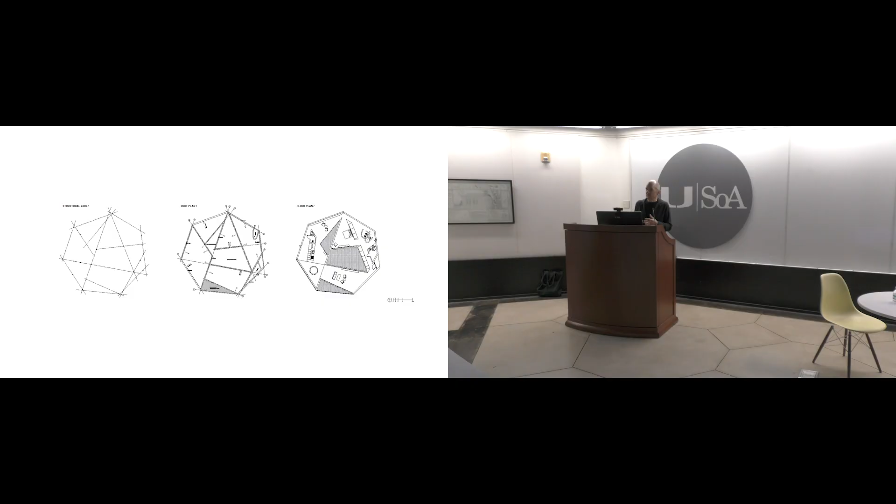And if modernism had transparency in the dissolution of those spaces between inside and outside, I'd say really we're in all spaces at the same time, almost between our body and our psychological self.

Architecture is defined, I would argue, by its generational spatial problems. Not so much the form or the decoration or the aesthetics of architecture, but really by its spatial problems. And simultaneity might be one of our great spatial questions.

You see in the house on the left, this kind of pivot point in the house where the master bathroom is straight ahead of you, the bedroom is in front of you, library on the right with the courtyard behind. All of those different spaces are seen equally from that singular pivot point at the same time.

This idea had a real effect on Carver Apartments, which was one of the first of a series of permanent supportive housing for formerly homeless individuals that we began to do with an organization, the Skid Row Housing Trust, where it was explored as an idea at a kind of different scale and more lodged in the city.

This project is very proximate to the freeway, immediately adjacent to the 10 freeway, with a continuous ground plane because the highway is elevated at that point. The shape had a lot to do with acoustics—the highway is very loud. By shaping the building, it started to deflect and pull away from the sound source, but it's also for the speed, intensity, and identity of the highway. The building almost seems to spin or pirouette as you move around it.

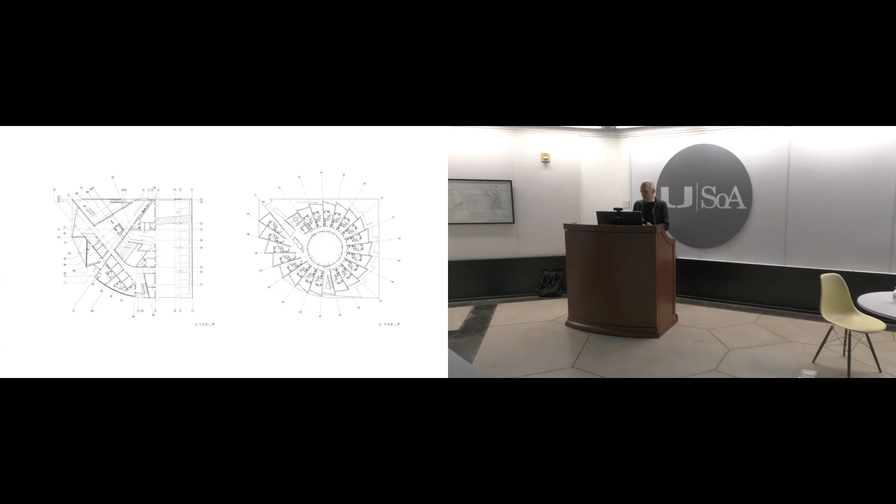As you move up from the second floor above, the building is organized with a series of studio apartments in a kind of spiral shape, all facing an internal courtyard. The building is built in the way that we build almost everything in Los Angeles housing: five floors, maybe four to five floors of stick-built construction above one floor of concrete.

What was interesting to me was that idea of the concrete on the ground floor, because it felt like it had some relationship to the highway and the underneath of the highway. I kept having this fantasy that the building was in some ways connected to this larger idea of infrastructure. At the ground level, you can see out through the building to the highway underneath it.

Internally, the courtyard, as you're looking down, has a series of steps which form an amphitheater. They become a kind of social heart in the building. But as you're looking up, you see the sky—it's open to the day, to the night, to the weather. And the light reflects down along those fins, which help to create some sense of veil, a little bit of privacy as you move around the internal space.

But they have to do more than that. In all of these projects, the economics are so difficult that every element, in my mind, has to have a kind of tripleness to it—it has to do three things. In this case, it acts as a kind of visual screen, and it has the structural hangers, so all of the balconies are hung off of the building.

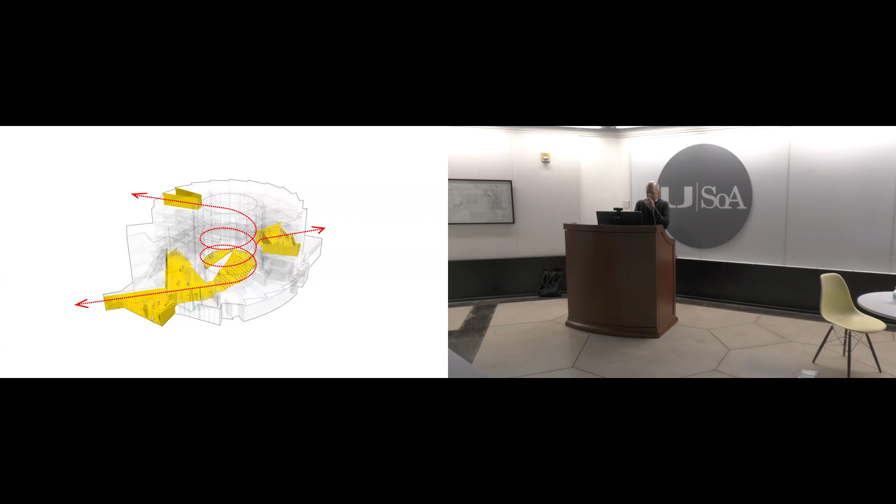There's a series of community spaces in the project, not all organized on one level, but spiraling up along with the building: community kitchen and garden on the ground floor, that amphitheater I mentioned, and at the top floor this outdoor porch which looks to the city. Maybe one of the most important spaces is at that middle level on the right-hand side, which is the TV room and the laundry room.

It's a place that people, even though it's not very glamorous programmatically, is the part of the building that everybody goes to almost every day. I placed that on the same level as the elevated 10 freeway, so that when you're in that space, you're seeing the people passing by, and more often than not, stopped in traffic right outside that window. But the important thing is the reverse of that equation, where the people on the highway, who normally move by this community and leave it in a kind of anonymity, have the opportunity to look in and create a kind of connection, even for a moment.

When I was doing the project, I had this fantasy of connecting two types of civic or city infrastructure, housing and the highway. The image starts to portend that, but the idea of infrastructural scale really stuck with me. Could housing be seen as an integral part of the infrastructure of the city in the same way that bridges, roads, waterways, and electrical power lines are? Could it have that same kind of essential importance, and also borrow some from that scale?

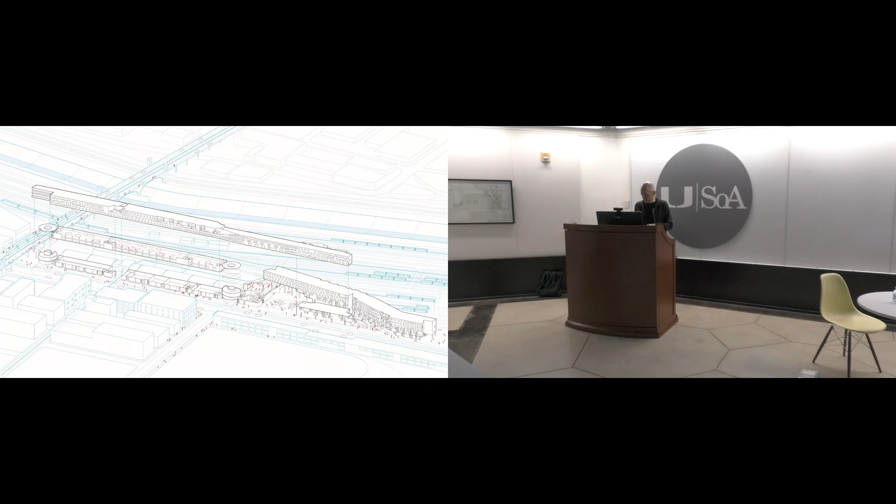The program is organized almost like a Neapolitan sandwich of different program types. At the top it's primarily housing, everything from single studios to 4-bedroom to living room spaces—almost the most affordable way to live here, since you can live as a group of 8. In the mid-level there's additional housing, but also two levels of above-grade parking that can be converted in the future to additional housing units. And at the ground floor, 80,000 square feet of retail space.

Even at the scale of a building a quarter-mile long in a place like Los Angeles, the suburban model, especially of construction, persists. It still defines the way we tend to build a project. So in this case, while there might be concrete up to the 3rd floor, it's still a wood-frame building for the most part, using and borrowing many of the same assembly-line techniques that built the suburbs outside of Los Angeles, all around the country—Levittown certainly.

The bridge of the building is important. As I mentioned, there's a future rail station coming in on the right-hand side. The building at this point starts to raise up and layer over, almost like a palimpsest, with different functions and other elements of the project, whether commercial or some existing elements—something as prosaic as the parking lot. The parking lot is designed so it can be cleared out regularly and becomes a kind of civic plaza for the building.

I like this image because, going back to that idea of identity—as opposed to architecture that exists on picture postcards, in the foreground or background as a kind of skyline—this building occupies almost a middle ground between those two worlds, becoming part of the textures and fabric of the city. Identifiable at times, you get glimpses of it, but just as often living in a bit of anonymity within the incredibly heterogeneous textures of Los Angeles.

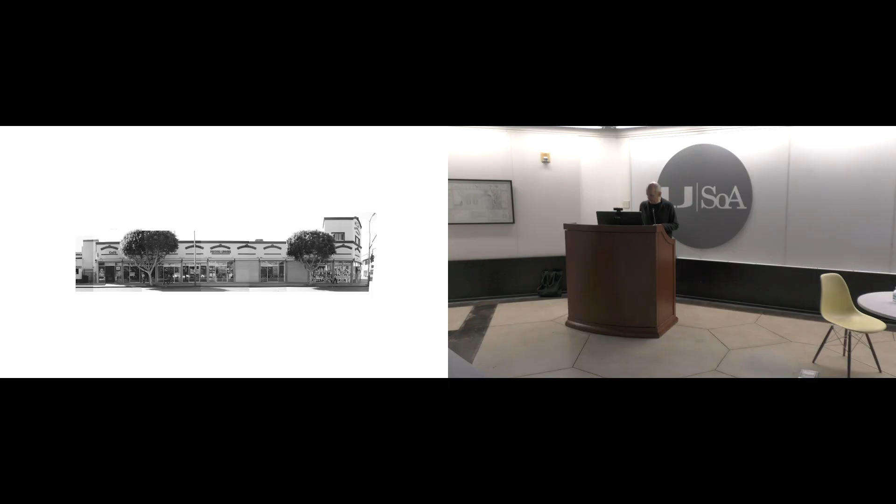There was this one-story existing building that we largely kept. We stripped off the facade, which was just stucco. But all of the structure of the building we kept as the base of the new building. This allowed us to maintain the entitlements to use it as a commercial space, and to be able to reuse the deck of the building.

We then made a new tray—a new concrete tray—that in a sense almost feels suspended above that building. The modular units are then stacked on top of it, creating this in-between space, this layer within the building.

Density, this scale, with almost every part of the site built with this 5-story mat of housing, might not be unusual in cities, and certainly isn't in a place like Tokyo, but is a completely foreign concept in Los Angeles, and really created pressure not only in terms of how you might live there, but in terms of how you might build there.

There was no staging space really for the building, and that's where prefabrication started to become very much an issue. As I mentioned, it wasn't something that had been done, it wasn't even allowed in Los Angeles from a code standpoint. Much of our work as architects was to create a pathway with the city, even before we started design.

To figure out a way for the city to permit and entitle the project. Interestingly, because there's no real prefab in the city, all of the units were built in Boise, Idaho, and then trucked down. When they finally all got there, all of the units were stacked in under 3 weeks, which means it was almost like an instant building. The interiors were completely finished, they were all tapped together, all the utilities were tapped together, and then we placed a new skin on it.

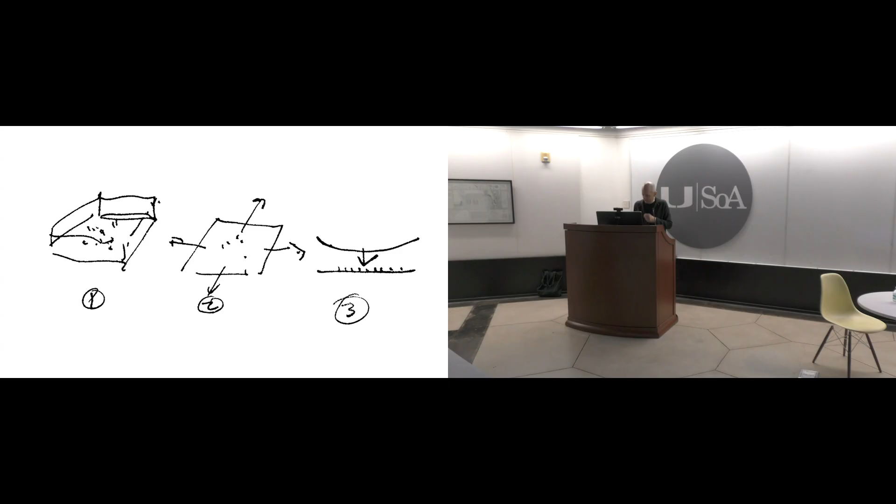That mid-level I mentioned is really the community space for the building. I think there are a number of ways that you can begin to form a room, a place. The traditional way might be a traditional interior space or almost a piazza with buildings wrapping around it to create that kind of urban room. But I was more interested in how you might be able to form that kind of space, not by creating pressure from the sides, but really from the bottom and the top, to create this layer that said something about both what was below it and what was above it.

On that in-between layer, there are many of the community functions organized. There's community kitchen, community garden, where they grow a lot of things for the community kitchen and for their own kitchens. Vocational classrooms, there's a pickleball court in a quite tall part of the space, there's a jogging track, art classrooms. So it's almost like this amalgam of the types of civic spaces you might find in community neighborhood corners and parks in Los Angeles.

Building is built in a very direct way, again almost like a piece of infrastructure. The economics of the building meant that it would be in many ways quite raw, but I think that muscularity is a real part of the character of the building, where you see the structure and the overlaps of those spaces. In some cases, with the stairway, this texture and the stacking of the fluorescent lights create almost a sense of a kind of spatial installation in the building.

The top right-hand corner is where the pickleball court is now located, and that scale of space is also unusual in something like an affordable housing project, but really tries to be a kind of community civic or city hall as much as it is a perfunctory space.

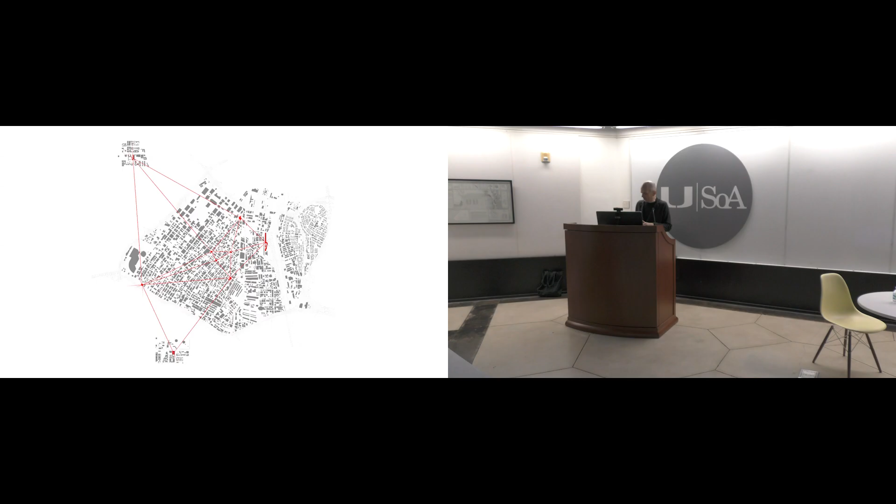It's a more iterative, time-based idea where you begin to add a number of smaller increments. This is a map of the different projects we've done just in the downtown area, with a lot of these Skid Row projects, as well as One Santa Fe, where over time they start to create a network that, taken together, is as large a scale as any of those larger transformative projects, but happens in a way that also weaves the city, the grains, the textures, and the life of the city together. That idea of connection is hugely important to me.

We've certainly been exploring it in ideas about individual buildings and their relationship to the city. But we were also able to explore the idea of true connection in a very realistic way, across lines of division in a more literal way, with the Sixth Street Viaduct that we finished in 2022, which crosses the LA River, connecting Boyle Heights with downtown—you can see it with the arches in the middle of the image.

The fact for me was that the river was just one of the lines we were spanning. In fact, I thought the old bridge, which had these two pairs of arches right at the river, celebrated the river, but in a way celebrated something that separated the two sides of the city, as opposed to the idea of a bridge as a more connective element.

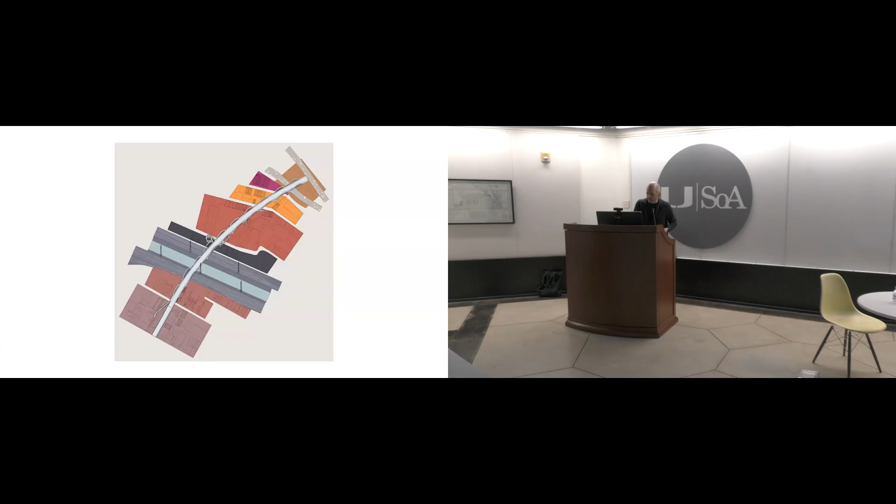If you really burrow down into the analysis of the site, it's not just the river. There are all of these lines hugely part of the city that the bridge needed to move across: water and power main lines, 11 separate rail company lines, the Army Corps of Engineers controlling the river, multiple underground utilities, and 3 state and federal highways. The bridge, in a sense, is a kind of civic skewer across all of those different elements.

This is an image on the left of the original bridge and those arches over the river. Those arches also had another role in the city—they were a kind of icon. They celebrated the river crossing, but they were also celebrated in movies, TV shows, car commercials—Grease on the right-hand side with the bridge above it.

I thought what was important, as I mentioned, was to connect all of these pieces. So I thought of taking that arched form and repeating it as a kind of connective ribbing, tying the bridge together from one side to another, but also maybe top to bottom, because the underneath of the bridge, since it's lifted above, is being developed right now. It'll open in about 6 months, a new 11-acre park for the community.

The arches are at many different spans and heights. The roadway is one big curved arc in plan. The arches tilt outward to embrace the sky. All of that gives the bridge this incredibly animated and alive quality, like it's really in movement. It's not a static or stable image, which I thought, in a way, was an icon for a city that is changing and moving as much as a place like Los Angeles.

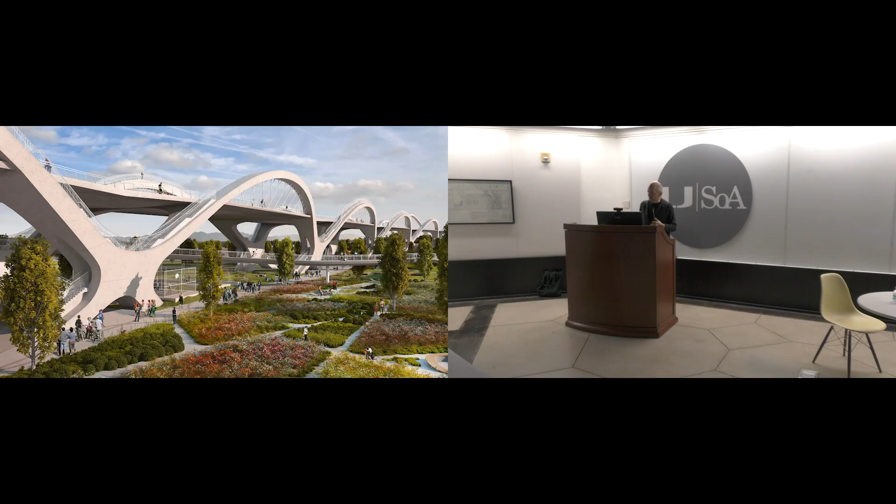I mentioned the underneath—it's just as important, with an 11-acre park designed by Hargreaves Jones. On this side of the park, there's another 1.5 acres on the other side of the river, which is a new performance plaza.

The goal in the bridge was not to just connect the cars side to side, but bicycles, scooters, joggers, pedestrians, and to use the arches as these access ways with stairs and ramps spiraling up through them so that the bridge becomes kind of an animated urban playground in many ways.

This is the park in construction. This gives you some idea, this was a bit earlier. The railings aren't on the stairs up, but you can see how the ramp runs through it.

At the base of each of those arches is a base isolator. It's a bit like a spring. We have earthquakes in Los Angeles. This is the longest base isolated structure in North America, so the entire bridge in an earthquake is able to move three feet in any direction to reduce the loads on the bridge.

But really the bridge deck and those spaces, not just the park, are important because they become this kind of civic piazza or plaza.

In thinking about the bridge, one of the things I was focused on was in a city like Los Angeles, which is a city of many different cultures but separated from each other and divided often by infrastructure, by highways, by culture, by economics, could you push an infrastructural project to try to do more, to try to be a kind of multicultural enabler, a place where many people come together, a place where some image of the city starts to be formed just really by the aggregation of all of those cultures in one place.

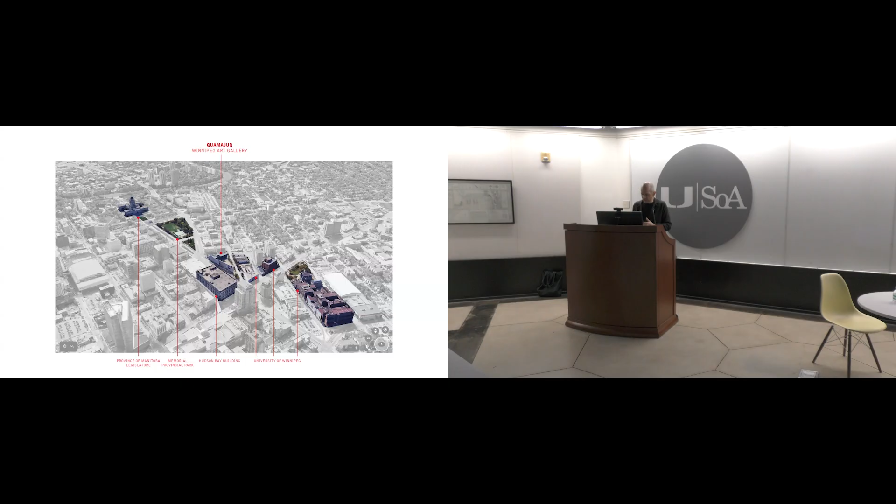It's a complicated site, situated among a series of buildings that are part of this troubling history. The Hudson Bay Company, a trading company and one of the first to go into Inuit communities to trade with them and bring back the art, forms a complex neighboring history to this building. Up along Memorial Boulevard, to the upper left, is the provincial headquarters, and that history with provincial governments for the Inuit community is very fraught.

You can see the provincial headquarters at the end of this boulevard. The existing Winnipeg Art Gallery that we were adding to was built in the late 1960s, 1969, by architect Gustavo da Roza from Canada. A very beautiful building, triangular form, really sculptural, but also incredibly insular and internal, as a lot of buildings from that period were. It's a sort of fortress for the art inside.

The ambition for Qaumajuq was in many ways in contrast to that. It started with a number of trips to the north to meet with the artists and elders in that community, to get a sense of the context at the Arctic Circle where the artists live and, more importantly, practice. It has this incredibly vast scale, and the work they make is completely contextualized in its materials, forms, and meanings by that place. There was a real question: how can architecture begin to make connections across these cultures and places, especially when it exists in the abstraction and scale of a place represented in images?

The museum had a long relationship with the artists in the communities of the North. This project grew those infrastructures and relationships to include the Artists Council, Elders Council, and the artists themselves, like Elisapee Ishulutaq, who is in the periwinkle top with silver hair, one of the most important Inuit artists working today. We spent quite a bit of time there, but it was really in these group conversations, not just seeing the site in the landscape, that we began to embed a number of the ideas most impactful for the design.

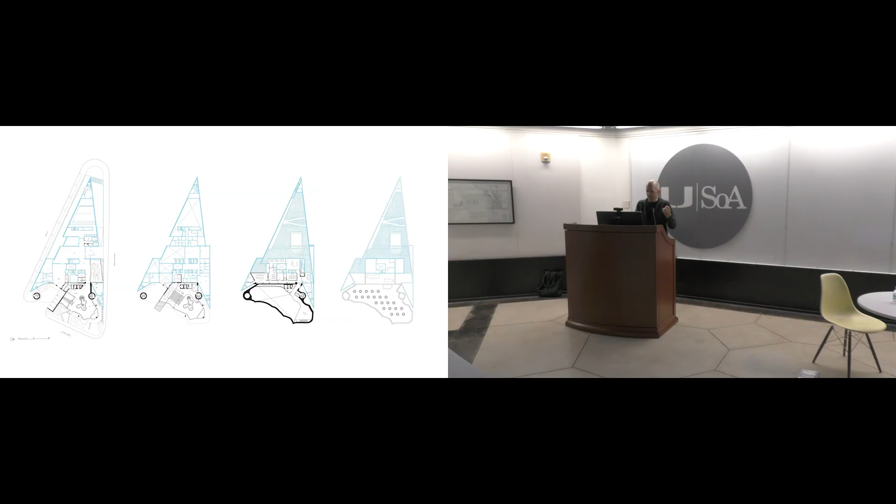The building also had to have its own identity, even if it was joined to the Winnipeg Art Gallery. So in a way, the existing building and the new building were meant to be two separate objects, but almost acting as one object in conversation.

The building is made out of granite bricks. That was another consideration. The artists had asked that the building really be made out of stone, much like the sculptures they make are made out of granite and stone. The building feels like it almost floats off the landscape.

It has a kind of scalloped form, which certainly communicates a bit of that fluidity, but it's really trying to capture the light of the place. The light in the north, but also the light in Winnipeg, is very beautiful and changes significantly. It almost seems to embed itself in the material as it moves across those facades, and the building and the light interact in a way that changes significantly over the course of the day.

The bricks are laid in a kind of wave pattern that slides across the facade, giving another kind of scale to the facade over the course of the day. At street level, the building lifts up and becomes very transparent, so that the inner portion of at least the public spaces can be seen whether you're coming into the museum or not.

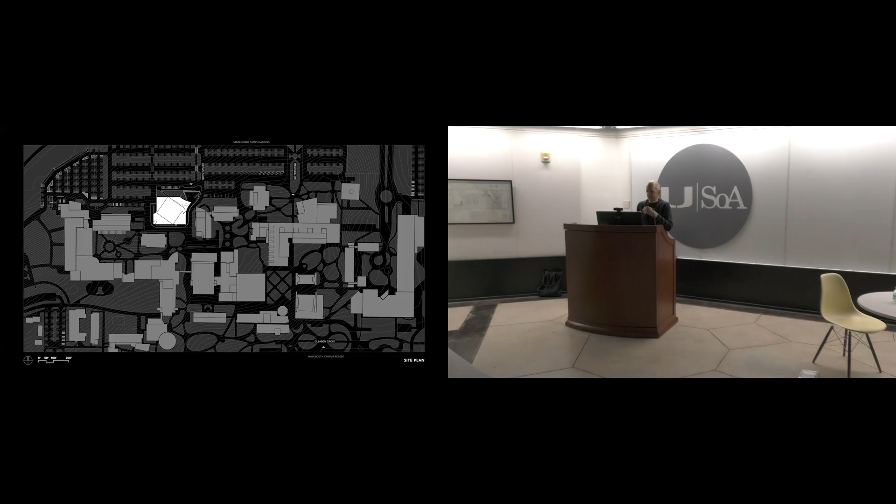The campus has expanded over time, and our building is at another end of the existing campus, really a threshold between the campus and the outside where all the parking is. It's a 750-seat full proscenium music hall, and has, because of its two-sidedness, two very distinct edges. The plan of the theater is at that center — a kind of horseshoe-shaped theater. It almost feels like it rotates as a form between the inside and the outside of the campus.

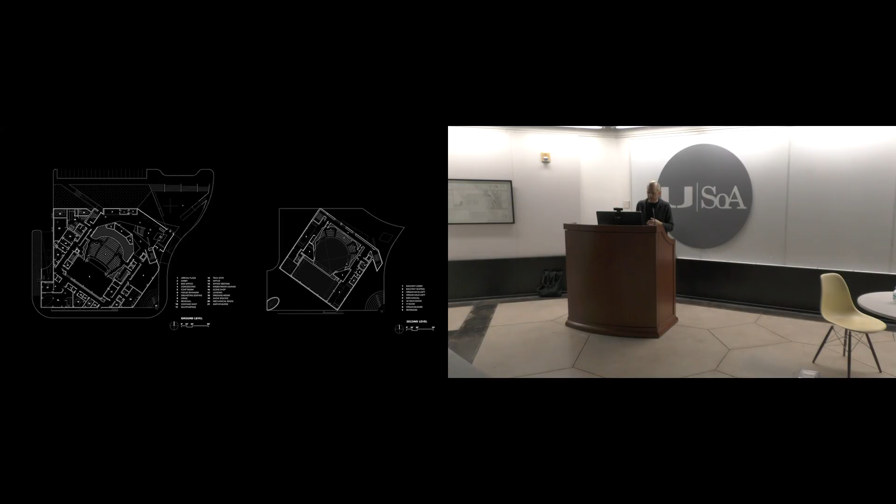What's maybe most consequential is that all of the normal back-of-house functions aren't hidden away in the building, but are organized along the perimeter with glass facades, so you can see inside — the costume shop, the set shop, the rehearsal spaces — as you move around the building.

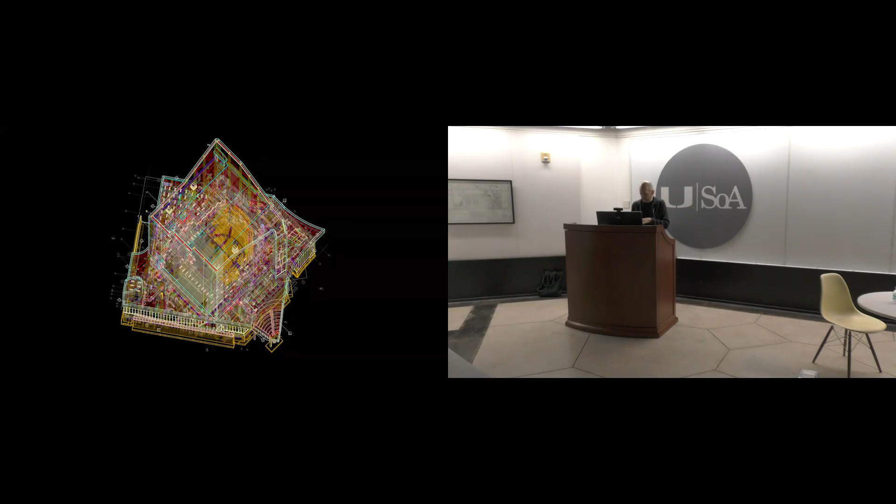There are a lot of things here. One thing I want to point out is the color key, because color here was really used as a sort of material. In this video you'll get maybe not so much a sense — you will in some of the other photographs. Obviously a very different context than Miami.

It really sits along that edge and becomes an entry point along that curved street into the campus. Then moving back out from the campus, you start to see the building and how the rotation of that box comes and registers with the lower plinth.

The facade is an aluminum panelized facade made out of a series of extruded tubes. Those tubes relate to a number of things, one of them being this historic organ inside the building.

As it turns from day to night, the interior starts to become much more visible, and these colors on the inside of the facade become that much more visible. Again, these photographs are from before it's been fully occupied. That whole lower level is where the back-of-house spaces start to really be seen as you move around.

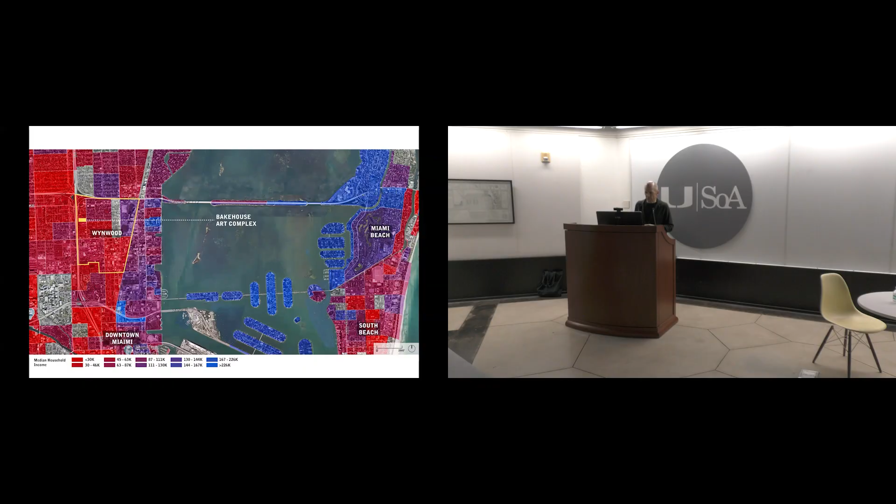This is a map currently of income levels, median income levels. Red is less than $30,000, that's the most challenging economics. As you move to darker blue and purple, the economics, of course, get up well over, as a median income, $160,000, $200,000. You can see that kind of pressure is only going to continue to increase as the movement of that blue and purple starts to, let's say, move from right to left and continues to push up against Bakehouse.

The project is incredibly ambitious. It has a number of different important parts to it. It's bounded, as I mentioned, by the 95 freeway.

The 95 freeway along this edge, 32nd Street, which has a school across the street from it, 33rd Street, really single-family residential houses, and then Fifth Avenue along this other edge, where you can really begin to see the development happening.

Bakehouse exists in these 4 existing old bakery buildings that have been its home over the years. Those buildings stay, but we're replanning the interior to work better, to be more efficient, to add more space.

The yellow portion along 33rd that then begins to snake out to the existing entry of 32nd is space that will have expanded studios, potential almost storefront space at times for artists to be able to use.

It's also in the form that moves towards the entry, a kind of shaded community portico that could have a community accessible library and cafe that's usable not just by patrons and artists at Bakehouse, but really by the community as a whole.

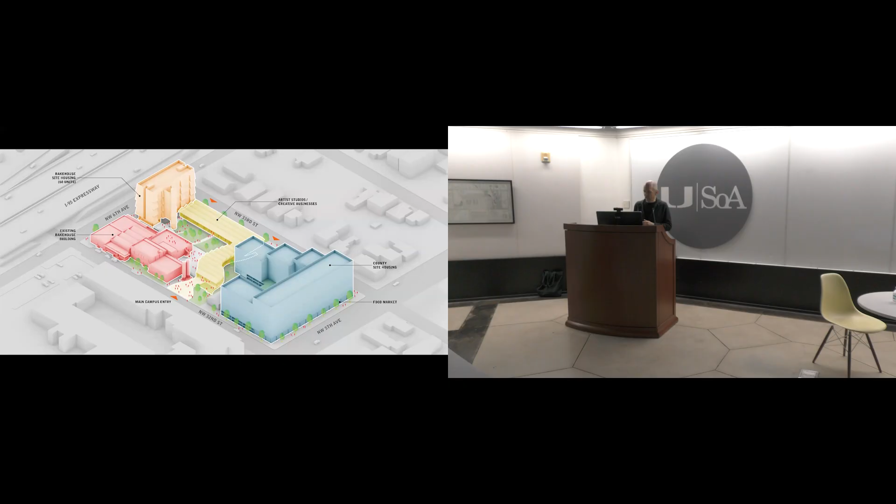This is a county site that Bakehouse is in conversation with the county about how that space really works best for the community as a whole. Bakehouse certainly, that site looks like it would be designated for housing. We think up to about 230 units could be built there with ground floor retail. This just gives you a little bit of an axonometric of those forms and how they begin to work together, but also the scale of the neighborhood.

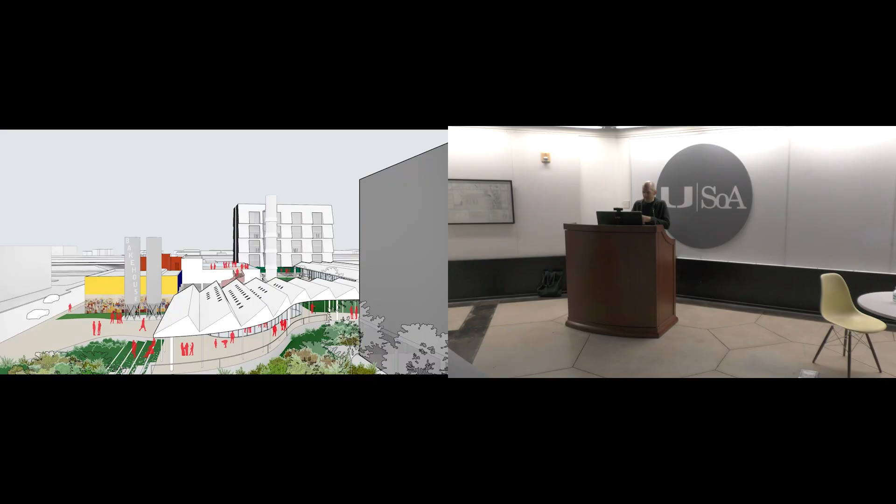The entry from 32nd Street is met with this big porch canopy that swoops out from the center of the campus to greet visitors, acting not just like a welcoming porch into the campus, but really a porch back out to the street. I've had these experiences after events at Bakehouse where everybody pours out and kind of hangs out in this space where they're waiting to be picked up or their Uber ride. It's also this kind of place where the city and the community of Bakehouse meet in a more informal way. I think that's only going to continue.

As Bakehouse grows, we're creating these landscape elements, a stepped amphitheater where people can hang out. Maybe performances could happen really on the street. There are these two great grain silos that have been left from the original bakery, and here we're starting to mimic that in the elevator that accesses the affordable housing in the rear of the view.

From 33rd Street and the neighborhood, scale is very important. The housing is larger, but these studio spaces start to reduce in scale. They become a porch in and of themselves, a lively place for artists in the studios to spill out onto that porch, having conversations with the neighbors around, a place for the neighbors to hang out, artists to hang out, to really create an edge of connection.

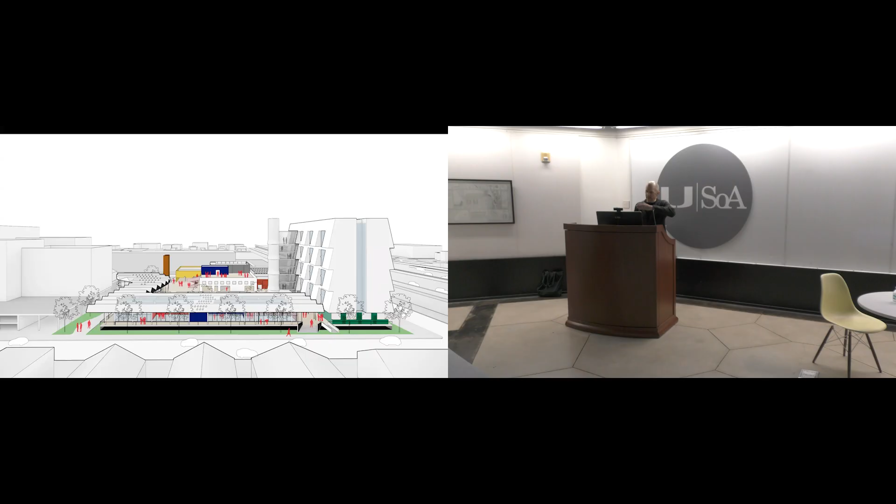The folded sky roof of this new form, and even the folded form on the housing, starts to recall some of the folded skylights of the original Bakehouse building.

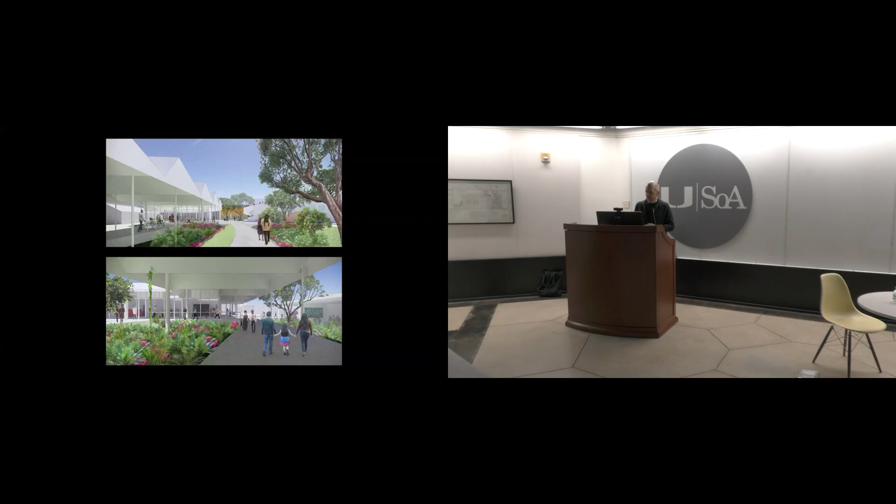There are a series of pathways that move through and across these outdoor spaces, mostly shaded, but of course some in the garden, all in an attempt to find ways to create places where people can pause, interact, and create that campus community.

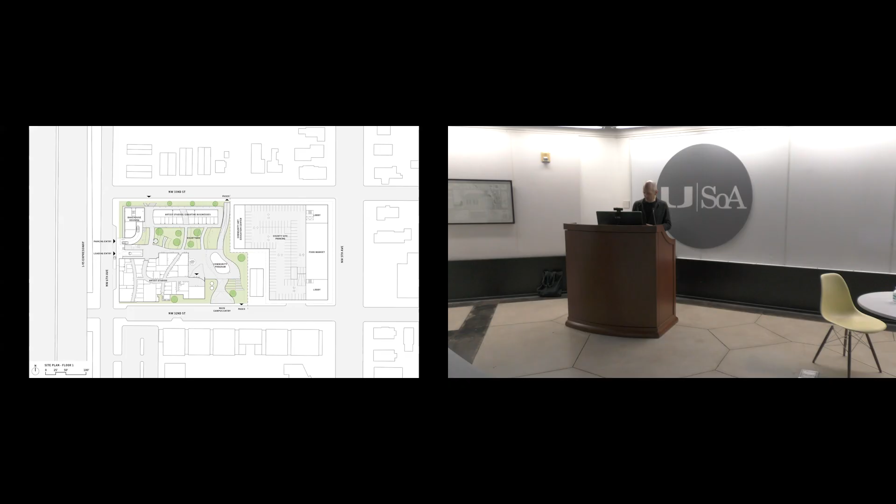The plan really begins to be figured by these long linear elements, almost as if a kind of landscape structure comes into the building, and landscape and interior space are more intertwined. They're not so isolated one from the other. This is the entry off of 32nd Street into that garden, the new hallways through the existing bakehouse, the housing on the upper side, and the studios off of 33rd Street.

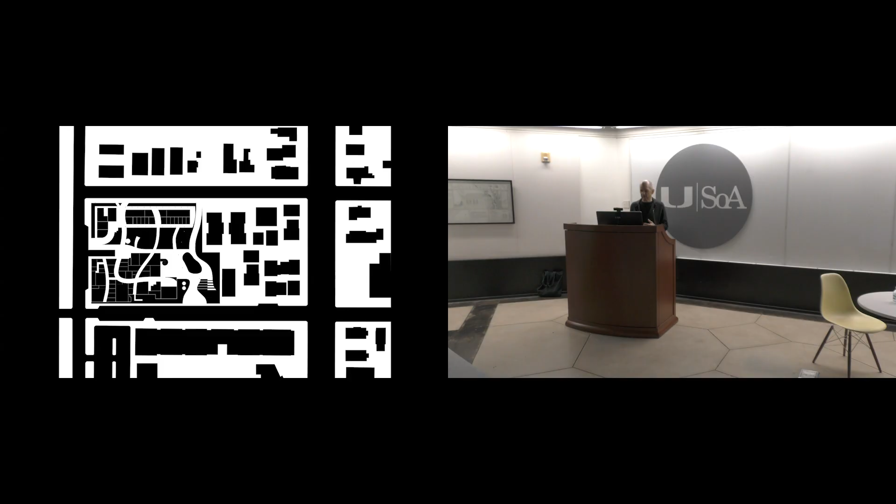I like this diagram that we've been looking at, the figure ground. Of course, this is very much an architect's drawing, but where you start to reverse the form and the spaces, you get a sense of how important these interlocking lines, these long arcs and fluid threads through the building are to the overall character and connection within the campus, but also to the community outside of it.

Those hallways are really meant to be these very active spaces between different types of studio space. It's not a double-loaded corridor where you walk by with doors on either side and you don't really see what's going on, can't see anybody in the distance. We're using it almost in the way that a kind of picturesque landscape or garden is made, where your farther view, what's happening beyond, is constantly in your perspective. So you begin to put together an unfolding view of the activity in Bakehouse.

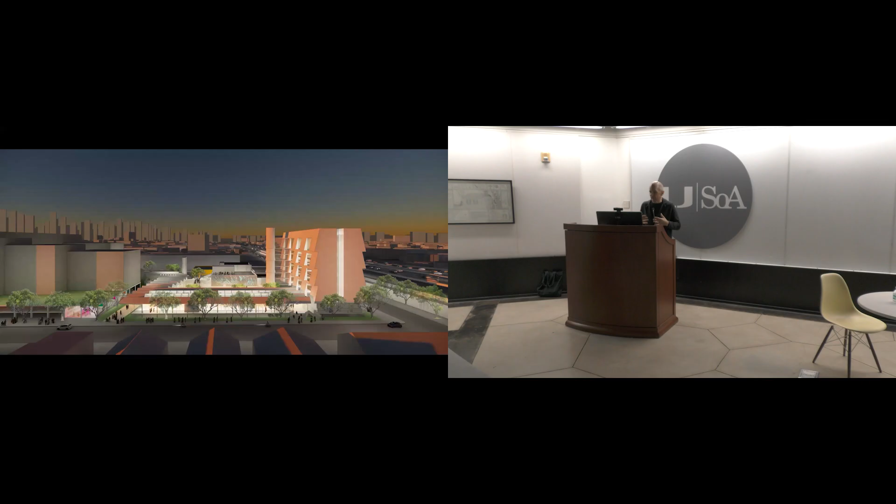I want to finish this image. I was talking about this a little earlier today as well, that I mentioned when I started to talk about Bakehouse how excited I am, because it touches on many of the elements that I think are certainly important to our work, but I think are deeply important to the idea of the city and of community and of the sustainability of community. Bakehouse is really going at that like a kind of torpedo, like a laser beam with this project.

The arc of many growing cities, the cities we admire because they're really growing and dynamic, is that there are places in the beginning where they create lots of freedom to do things. There are lots of places you can find in the periphery to be an artist and have a studio and make something. But over time, as the city grows and becomes more successful and wealthier, it often begins to move into those spaces, take them over, and edge that kind of creative community out of the equation. It adds larger cultural spaces where people can see things that are made, but the opportunity to preserve and grow places where things are made becomes much more challenging.

I think the healthiest cities are not one or the other. The healthiest, sustainable cities are cities that are great to see things in, but they're great cities to make things in as well.

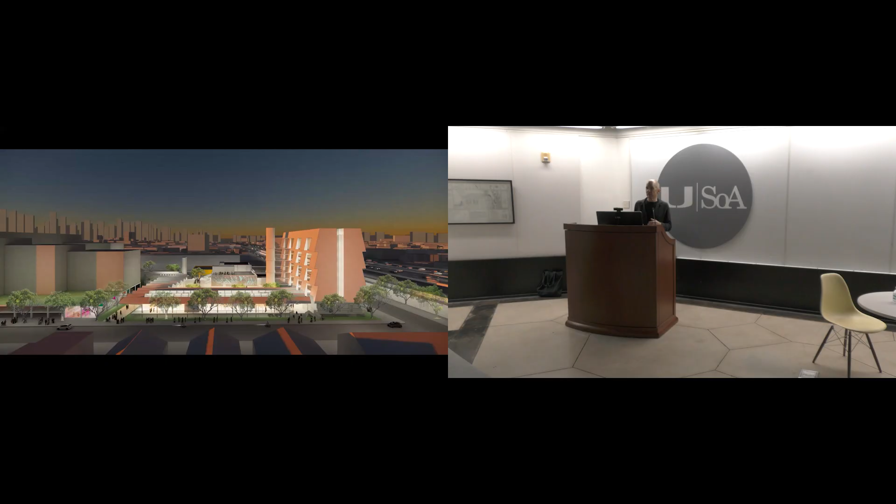In the case of Bakehouse, certainly a place for artists to make their work and connect that to a community of people who are interested and collect that work, who come to see that work, but also a place where you can make true community happen, where you can create and weave together an idea of the city, maybe a kind of microcosm of the city, maybe even a more perfect vision of the city. I don't think it's asking too much, especially for architects, to make that an ambition for our projects, to make architecture perform in such a way that it really becomes the catalyst and eventually the armature for producing that more beautiful vision of what a city can be. And we're excited to be part of that here in Miami.

I'll stop there. I appreciate being invited. Thank you very much.

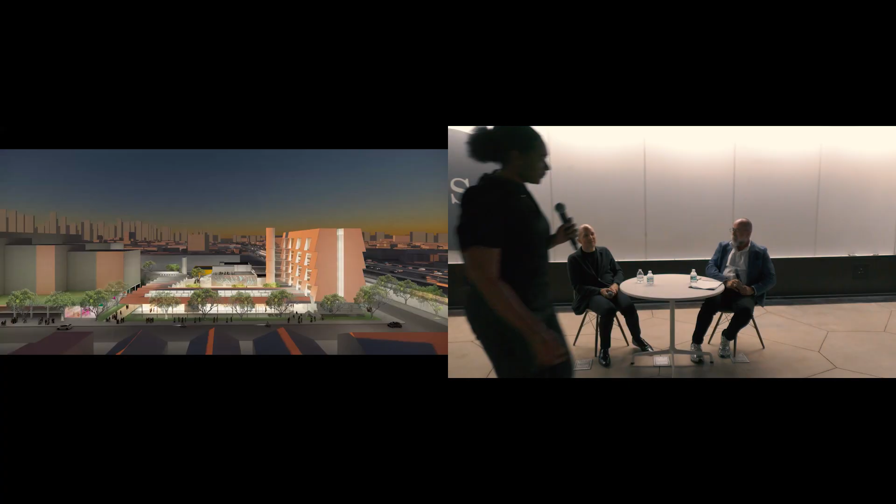Okay, thanks for waiting. Thank you for coming and giving us an excellent lecture.

I think Miami is so often situated in between the kind of urban metropolis of New York and the more suburban metropolis of Los Angeles. And if Miami were to ask New York spatially what it needs, New York might say things like, well, you need more congestion, you need more brownstones, you need more wedding cake zoning. What do you think, if Los Angeles had to give advice to Miami, what kind of advice would you give? I love that idea that these cities are like calling each other, having Zoom calls and throwing ideas out at them.